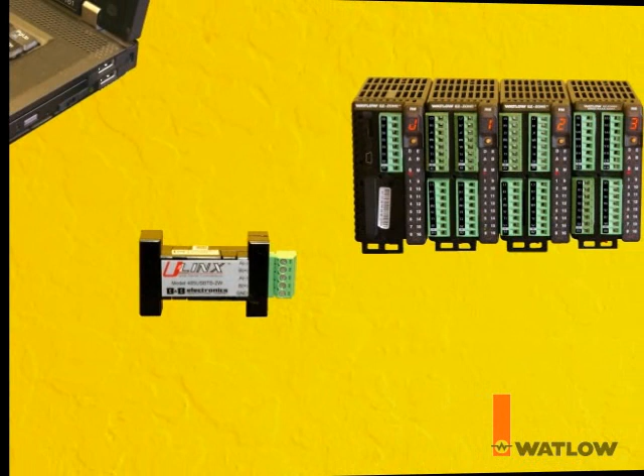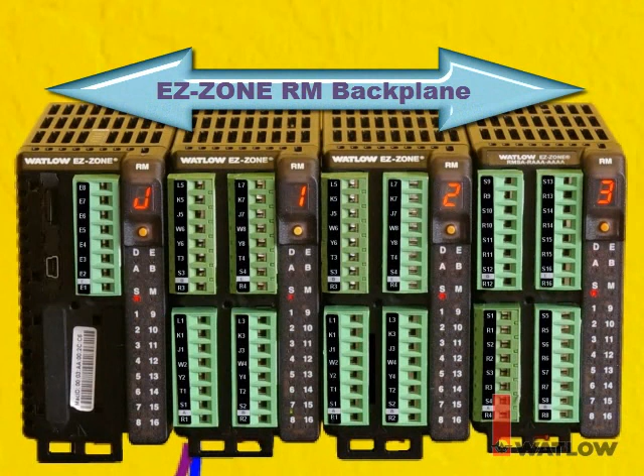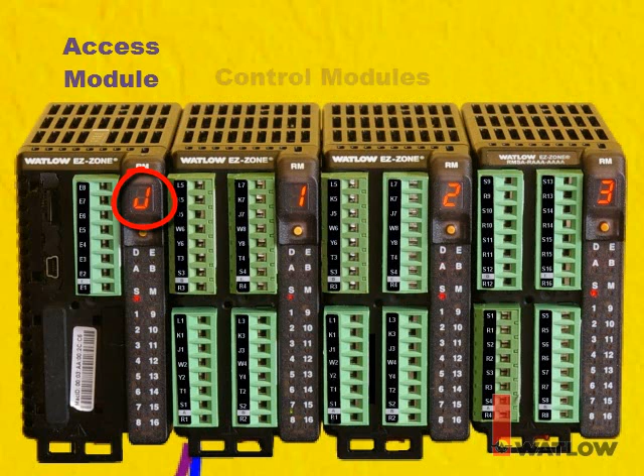Next, using EZ-ZONE configurator, we'll set up the EZ-ZONE RM access module. Connect the computer to the access module via RS-485. Here we use a USB to 485 converter. The EZ-ZONE RM modules are connected together at their backplane connectors. Each is configured for standard bus communications and set to a unique address. The access module is set to address 17, displayed as J. The control modules are set to addresses 1 and 2, and the scanner to address 3.

Launch EZ-ZONE configurator. Choose Configure a device while communicating with it. Click Next. Select the COM port. Click the Advanced button to make sure the range of addresses to be scanned includes the access module. If you're using an RUI gateway, you'll want to be sure the program scans for remote user interfaces. Click OK and click Next. Choose the access module, the device with the part number that starts with RMA.

To set the access module's IP address, on the Setup page, choose the Communications 2 menu. Set the Modbus word order to word low high. Since we're using fixed IP addresses, set the IP address mode to fixed IP address. Set the IP fixed address to the next address for our network. We'll have to cycle power to the access module to make this address change take effect, but we'll do that after we finish configuring it. Set the subnet mask to the appropriate value.

Make sure Modbus TCP Enable is set to Yes. Disable Ethernet IP unless you plan to use that protocol with another device. Set display units to the temperature scale you want. And set non-volatile save to Yes so that parameter values you change via the OIT will be retained in the controller's non-volatile memory.

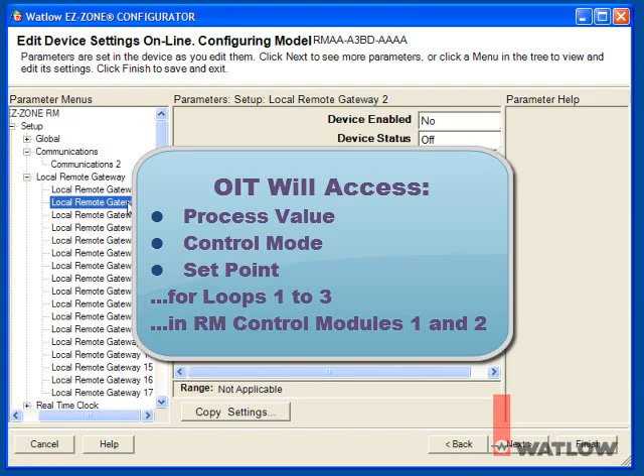In this tutorial, we'll set up the gateway to allow access to the process value, control mode, and set point for loops 1 to 3 in both the RM control modules. Consulting the manual, you can find the address for analog input 1's process value is 360, loop 1's control mode is 2220, and loop 1's closed loop set point is 2500.

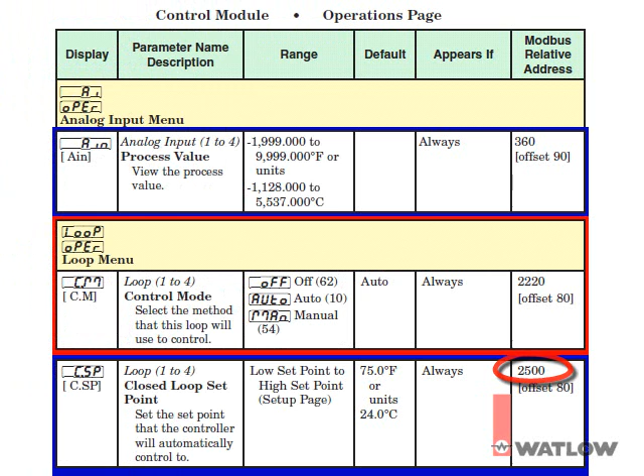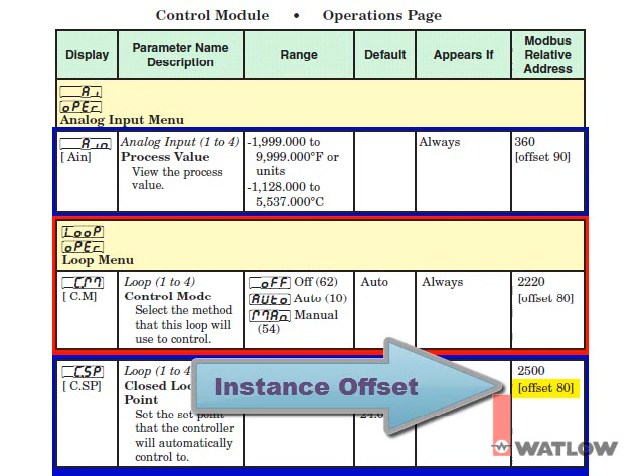Since the set point has the highest address, that's the one we have to pay attention to in selecting the gateway offset. Note that for each Modbus address in the manual, an instance offset is also included. That offset is used to determine the addresses for the other analog inputs and control loops. The instance offset listed for set point is 80, so the address for the second loop's closed loop set point is 2500 plus 80, 2580, and the address for the third loop's closed loop set point is 2580 plus 80, 2660.

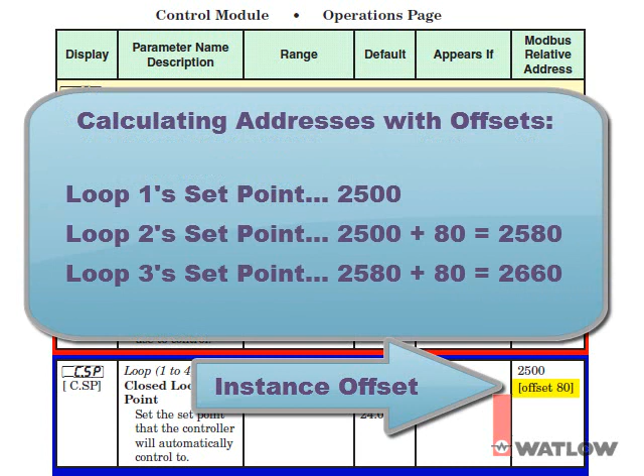To be able to access the closed loop set point for loop 3 in the first RM control module, we must offset the second control module's Modbus addresses by more than 2660. Let's set the offset to 5000. That gives us some additional room in case we decide later to access other parameters we haven't anticipated at this point.

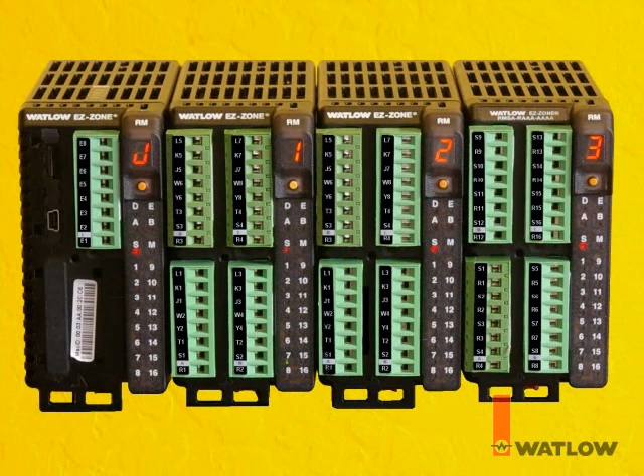For the offset for the third module, the scanner module, let's offset its addresses by the same amount so that the same range of parameters is accessible in the two RM control modules. To allow 5000 addresses for the second controller, set the scanner's offset to 5000 higher. That's 10,000. Close EZ-ZONE Configurator. Cycle power on the RM access module to make the IP address change take effect.

Launch EasyBuilder 5000. If you have previously edited a project, it opens automatically, so from the File menu, choose New. Otherwise, you will already see this dialog. Select your model. I'm using the 7-inch unit and will create my screens in landscape mode. With the Use Template option set, click OK.

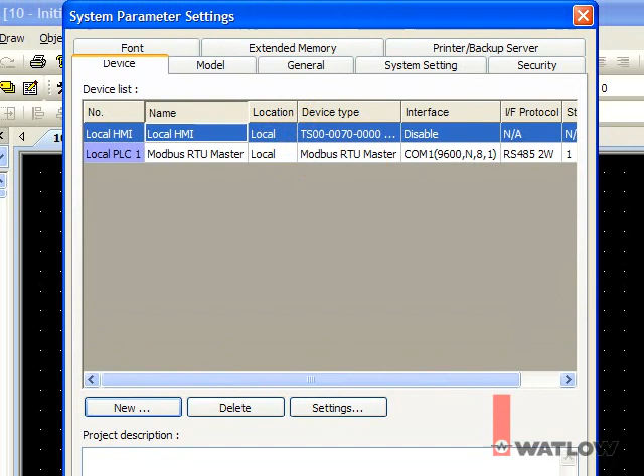The new project has two devices, the OIT called Local HMI and a Modbus RTU master. Since in this project the OIT will communicate using Modbus TCP over Ethernet, let's change the Modbus RTU master device by selecting it and clicking Settings. EasyBuilder 5000 refers to any device OITs communicate with as a PLC because that's a common type of device used with them. For PLC type, choose Modbus TCP Master.

Name the device. Since you will add a Modbus TCP device for each IP address that must be accessed, it makes sense to use a name that helps you identify what will be communicated with at that address. The PLC interface setting is automatically changed to Ethernet. Click Settings and enter the IP address of the EZ-ZONE RM access module. Click OK, OK, and OK again. Now we can start creating an interface.

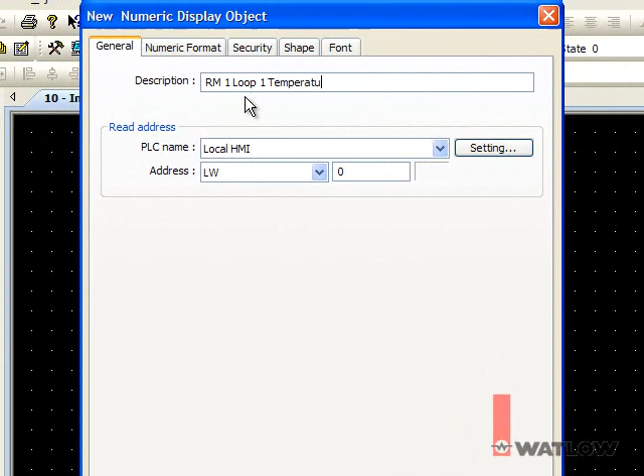Add a numeric display for the first process value in the control module with address 1. Enter a description. For PLC name, choose EZ-ZONE RM Access Module. For address, choose 4X and enter 361. You must add 1 to the address indicated in the EZ-ZONE manuals. On the Numeric Format tab, for data format, choose 32-bit float. Click OK and place the field. To create a label, select the text tool and enter the label text.

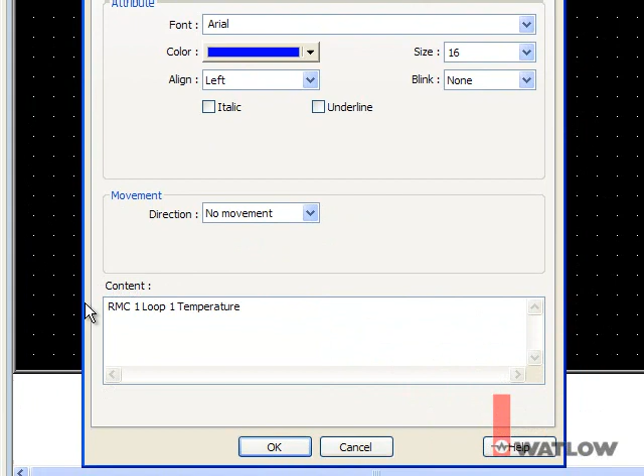You can go through the same steps to create another field for the second control module, but it's easier to copy and paste. Select the first field, press Ctrl-C to copy, and Ctrl-V to paste. Put the copy where you want it, and click the background to deselect it. Now double-click the copy to edit its settings. Change the description and the address.

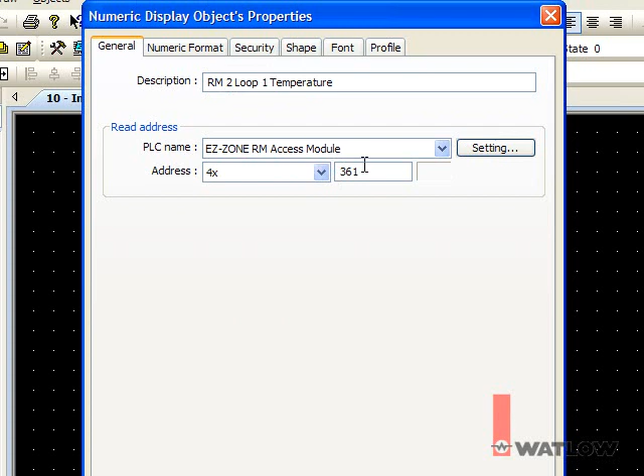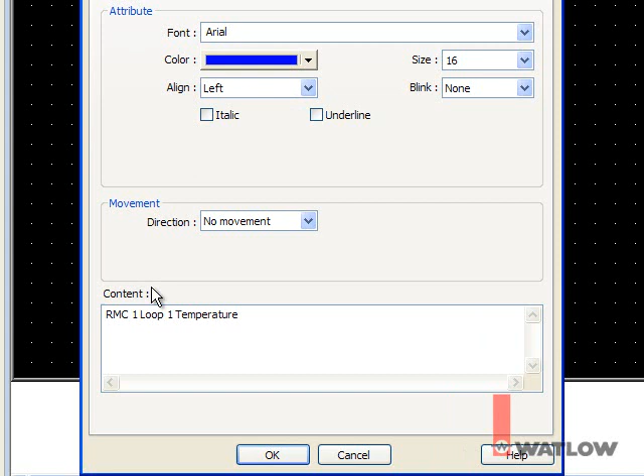The address of the first loop's process value in the second control module is offset by 5000, since that's what we set the offset to in the gateway. So insert a 5 to make it 5361. Similarly, we can make a copy of the label and edit it. Select it, copy, paste, drag, deselect it, and double-click to edit it. Make the change, and click OK.

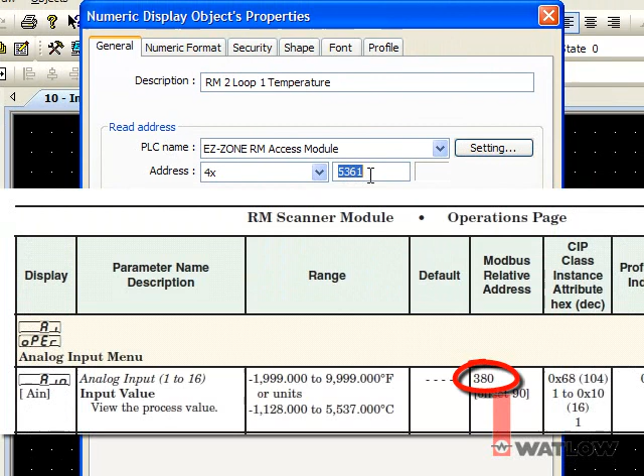To make a field to display the first analog input value from the scanner, let's just make another copy. To access the first analog input value in the scanner, consult the manual and find the Modbus address is 380. To that we have to add 1 to use it with the OIT, and add 10,000 because that's the offset for the scanner module we entered in the gateway. So the address is 10,381.

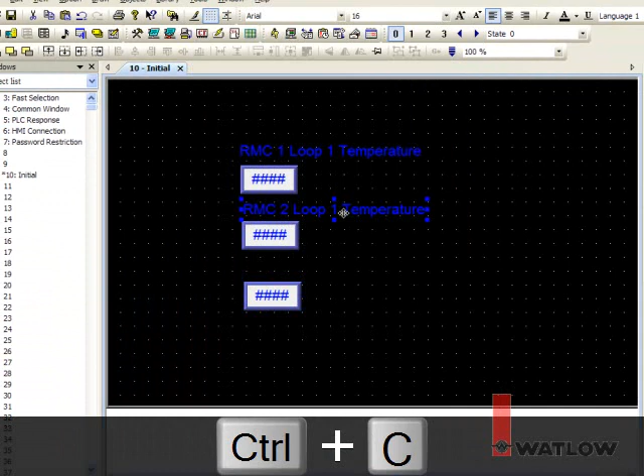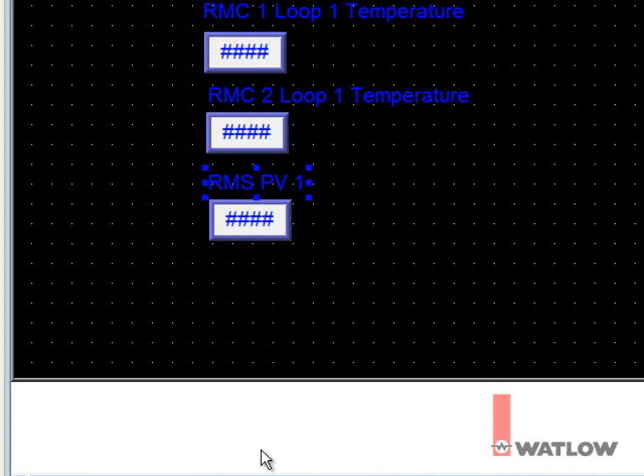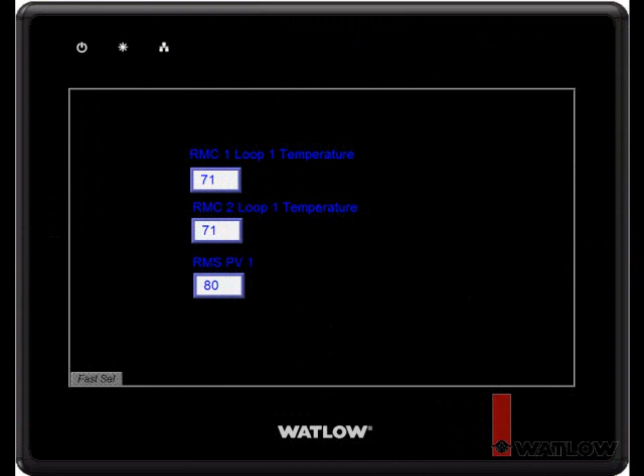Again, copy, paste, deselect and edit, and add a label. After compiling and downloading the project, the OIT displays the process values from the 3 RM modules that it gets from the RM Access module. We can add fields and other screen objects that read and set other values in the RM system as long as the values are addressable in the range that we configured for the gateway to support for each module.

Let's review. To set up Modbus TCP communications between a Silver Series OIT and EZ-ZONE products through a gateway in an access module or RUI, you must set the IP address and subnet mask in the OIT, enable Modbus TCP, and set the gateway's Modbus communications parameters including the IP address, the subnet mask, the display units, and the non-volatile save preference. And finally, enable a local remote gateway and set the offset for each device that will communicate through the gateway. These can be done in any order, but all 3 must be done, and don't forget to cycle the power to the RUI or access module if you change the IP address.

The steps for creating a new Silver Series project that communicates with EZ-ZONE products via a Modbus TCP gateway are: create a new project in EasyBuilder 5000, change the Modbus RTU device that appears by default to a Modbus TCP/IP master, enter the IP address of the access module or RUI gateway in the Modbus TCP/IP master, and remember, when addressing data in EZ-ZONE devices, add 1 plus the instance offsets plus the gateway offset to the Modbus address found in the EZ-ZONE user's manual.